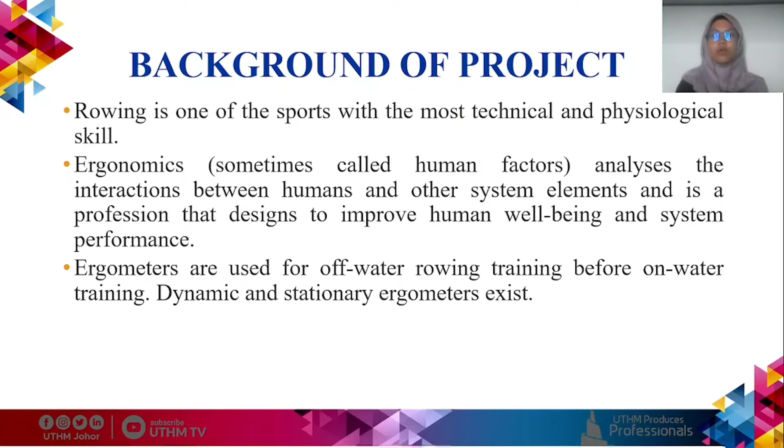An ergometer is one of the simulation tools on land for rowing training before going for on-water training. There are two types of ergometers: dynamic and stationary ergometer.

For this project, it is critical to have an appropriate posture and proper procedure when using an ergometer to reduce ergonomic risk factors. This project examines ergonomic risk factors of rowing without adequate technique, which may lead to injury for rowers. Rowers may get musculoskeletal disease and repetitive strain injuries if they have bad posture.

Using REBA and a motion sensor, rowers can enhance their ergometer posture. A preliminary concept for this project's exercise posture includes an ergonomic review.

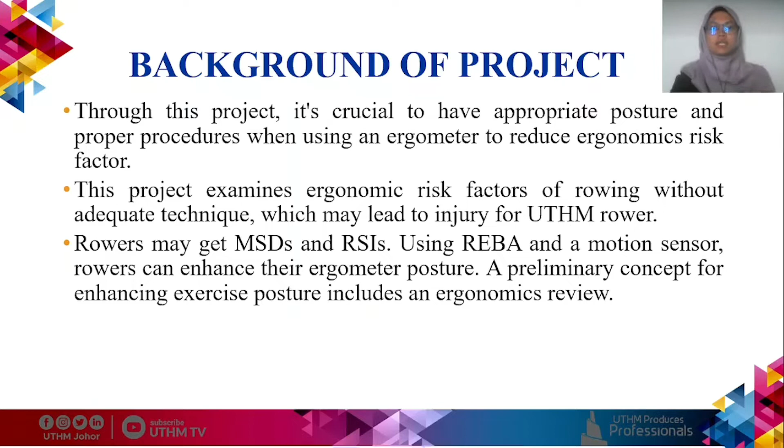We will proceed to the problem statement. In this project, the problem statements are: rowers often experience cumulative trauma disease and low back pain due to improper ergonomic posture, which is a bad posture in the ergometer rowing machine.

There is a lack of study on ergonomic risk factors for rowing ergometer machines that needs to be studied further. The majority of novice rowing or beginner athletes are unable to maintain an ergonomic posture on an ergometer rowing machine.

This project proposes an initial and advanced ergonomic risk assessment suitable for rowing ergometers that can analyze ergonomic risk factors.

In addition, using a motion sensor will improve a rower's ergonomic posture, which requires a greater ergonomic risk assessment and analysis. Poor ergonomic posture will increase the risk of slipped disc in the back and knees.

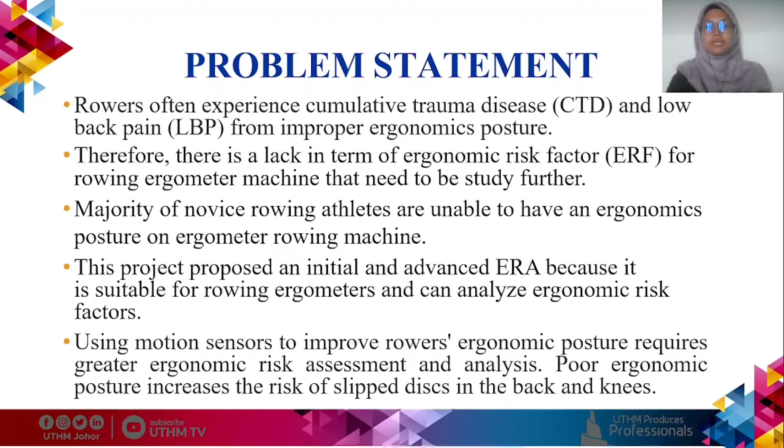The objectives for this project are: first, to conduct an initial ERA among rowing athletes at UTHM; second, to perform an advanced ERA for rowing athletes at UTHM; third, to implement a motion sensor device capable of guiding beginner rowing athletes at UTHM.

The scope for this project: a REBA worksheet was developed in accordance with DOSH. It was used to analyze rowing posture and movement using advanced ERA, advanced REBA, and motion sensor approaches. The height range selected for this project is 155 centimeters to 185 centimeters. The REBA technique is applied for implementing positioning of the motion sensor.

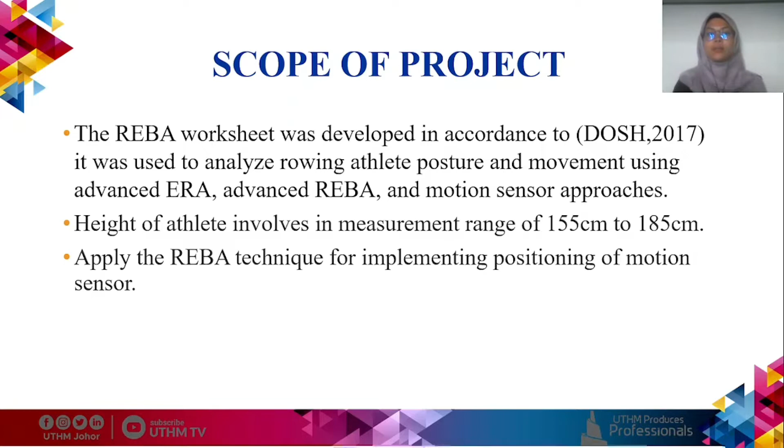The significance of this project is to increase awareness about the ergonomic risk factors associated with rowing athletes. As an alternative way, applying a motion sensor helps the athlete maintain proper posture during ergometer rowing machine exercise.

Next, we go for expected outcomes. What we expect from this project is to increase awareness about ergonomic risk assessment and deploy an ultrasonic sensor to improve rowing athletes' ergonomic posture, because this sport uses the whole body, so appropriate rowing posture is needed to decrease physical and mental stress.

Therefore, the ERA will train athletes on the importance of good posture and how to improve their performance via a motion sensor. This motion sensor device can guide athletes to a good ergonomic posture in the ergometer rowing machine.

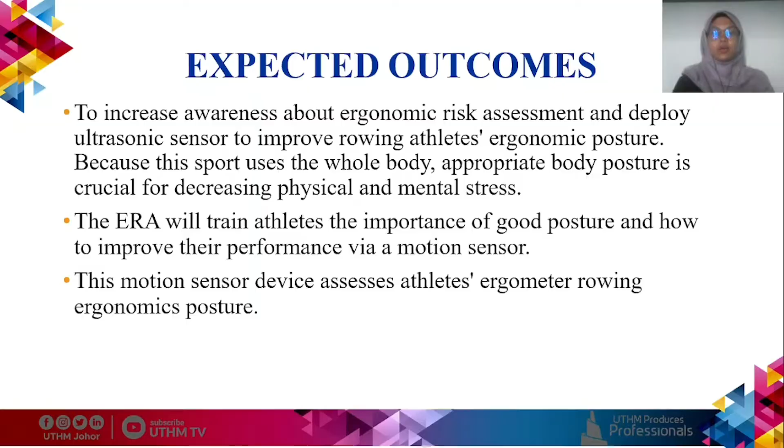So we move to the next chapter, Chapter 2, about literature review. In this literature review, there are some previous case studies I have gone through. The first one is about postural analysis using RULA and REBA.

The thesis is from Ansari and Sheikh. They found that RULA determined that most workers were at high risk and needed immediate change. Postural research by RULA and REBA demonstrates that overwork and bad posture are common.

The next thesis is on REBA in terms of development, application, validity, and limitation, by Al Madani and Dababneh. The final result found REBA useful for postural assessment in industrial health and care, construction, sawmill tasks, retail food, computer-based occupations, packing, school workshop, odontological service, firemen, and EMTs.

The method's drawbacks did not stop its deployment; it is still used and has computerized checklists and public domain tables.

The next thesis is a study analyzing rowing on a rowing machine using inertial sensors. The study is a comparison between experienced and beginner rowers, using machine learning to compare rowers to a reference rower.

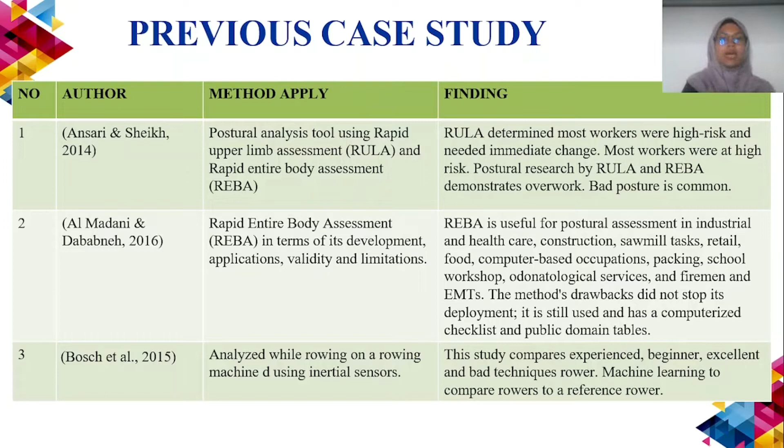The next case study is about an ultrasonic motion detector by Murtala Zungeru. It finds that the design senses enclosed motion. In this work, a transmitter transducer generates a 40 kilohertz signal that triggers a buzzer through a timing circuit. This system relies on signal interference from an intruder or moving object. The design installation fulfills standards.

Jones and Kumar have studies on 5 ergonomic risk assessment tools: RULA, REBA, American Conference of Governmental Industrial Hygienists Threshold Limit Value, Strain Index, and OCRA. The final result found that the percentage of perfect agreement varied by employment. RULA and SI worked best, with correct classification rates of 99% and 97% respectively.

The next case study is about ergonomic risk assessment tools including Quick Exposure Check and REBA by Motamedzade. It was found that the applied approaches have associated final ratings and action levels. Comparing action levels and final scores of the approaches shows no departmental differences.

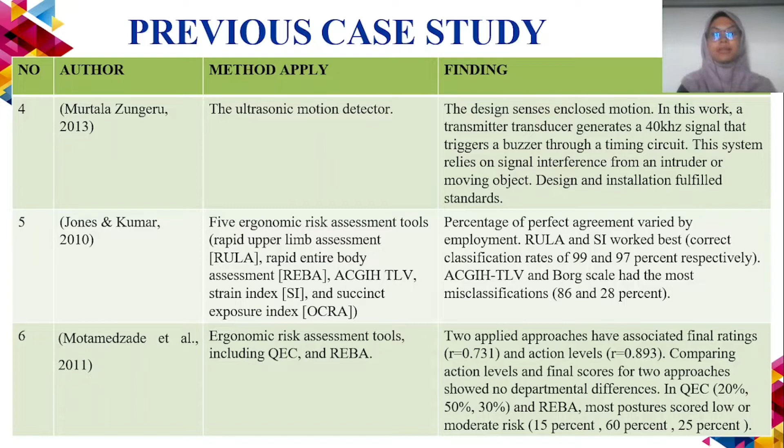The next case study used 3D skeletal modeling to imitate human body movement in an actual construction manufacturing plant for ergonomic risk assessment of a workstation. The final result found that 3 subjects were used to compare joint angle, body segment risk rating, and REBA or RULA risk rating and risk level.

Another study focuses on an ultrasonic sensor that measures the distance of a target object or material through air using non-contact technology. It detects an obstacle's distance. The inbuilt analog to digital converter is calibrated to measure distance accurately, and the LCD panel displays the measured distance.

This is based on Mustafa Gabriel and Paul Kuria's case study on the Arduino Uno microcontroller, ultrasonic sensor, passive infrared sensor, and others to sense and measure distance.

The test revealed the suggested sensor could accurately measure distance and display it on the LCD. The sensor emits a sound signal on a buzzer and a visible LED indicator for distances less than 150 cm, 70 cm, and 40 cm. This way of measuring distance is accurate. Enterprises and traffic agencies utilize distance sensing and measuring for proximity detection.

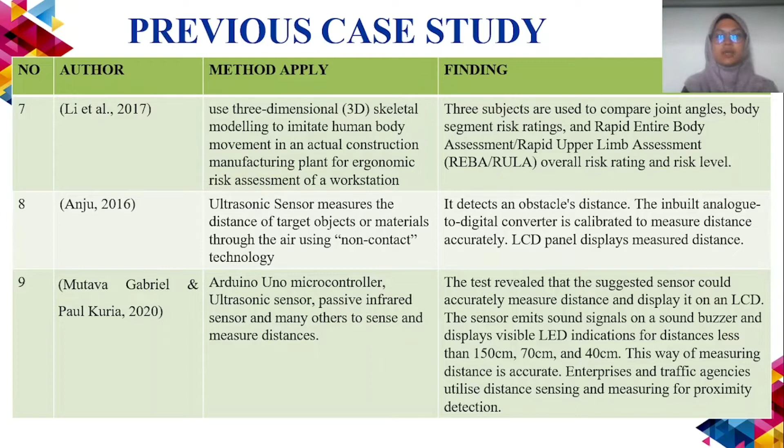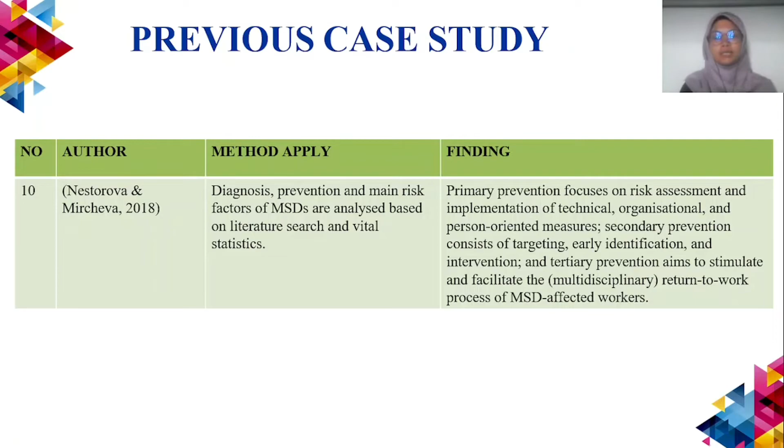Next, we go for the methodology of this project. The methodology will be concluded in this flowchart, from the start of this project until the end.

To start this project, we will go for the research background of study about ergonomics, about sensors, about rowing motion, and others. Next, we go for selection of the research question, which includes the posture and how we can analyze the data for the athletes.

Then we go for the posture. We collect the data by using videos or figures for the assessment. After that, we will conduct an initial ERA, and if it needs an advanced ERA, if yes, we will conduct an advanced ERA. If no, we will proceed to prepare the assessment report.

Next, after conducting the advanced ERA, we will apply a motion sensor to detect ergonomic posture on an ERGOMETER rowing machine based on the risk level. If no, after conducting the advanced ERA, we will go back to the research background of this project to find a suitable method to analyze the data for the rowing athletes.

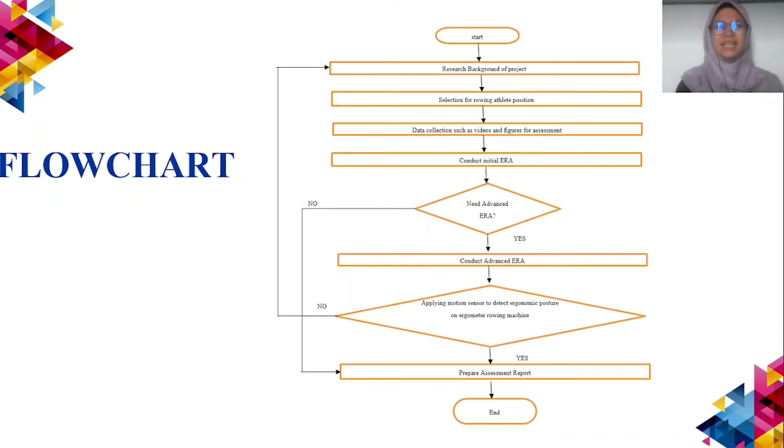If yes, we will prepare the assessment report, and that is the end of this project.

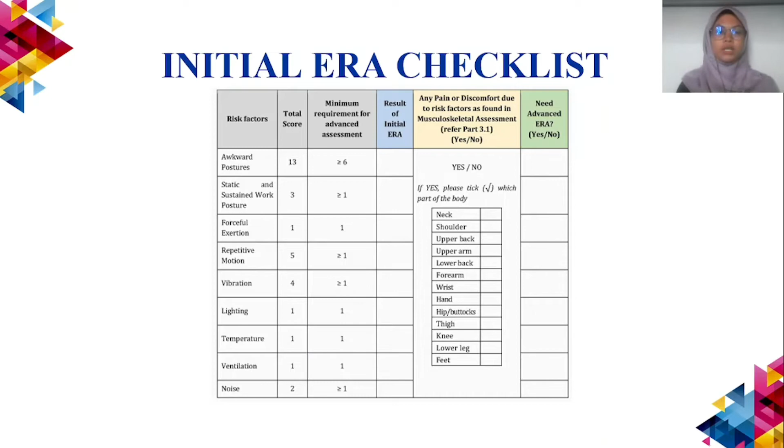Next, we go for the initial ERA checklist. There are 9 risk factors for the initial ERA, which include awkward posture, static and sustained work posture, forceful exertion, repetitive motion, vibration, lighting, temperature, ventilation, and noise. The result of the initial ERA, if high from the minimum required, we will go for the advanced ERA.

Next, we go for the REBA assessment. This REBA assessment is an advanced ERA after exceeding the minimum requirement from the initial ERA. So the advanced ERA includes six parts of the body, which are neck, trunk, leg, upper arm, lower arm, and wrist.

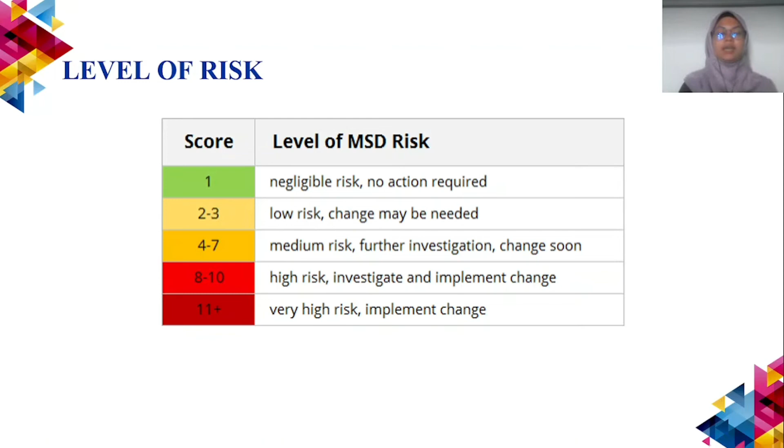This is the level of risk as mentioned before. There are 5 levels. The first is 1: the level of MSD risk is negligible, no action required. If the REBA score is between 2 to 3, it is a low risk and change may be needed. If 4 to 7, it's a medium risk and further investigation is needed. 8 to 10 is a high risk, needing investigation and implementation of change, and 11 and above is very high risk, requiring change to be implemented.

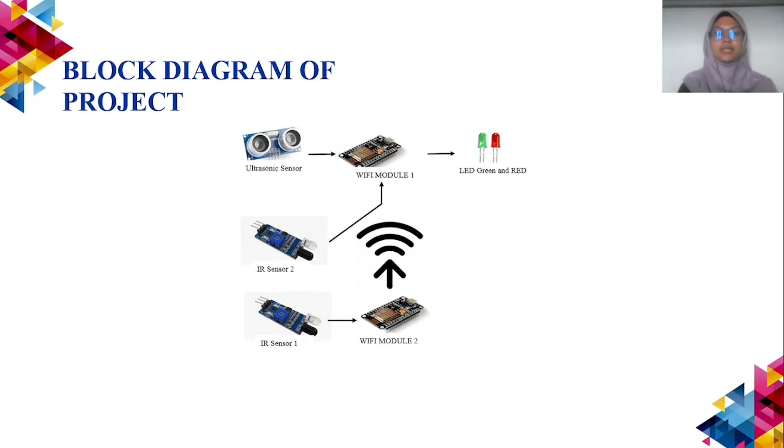Next we go for the block diagram for this project. The block diagram includes an ultrasonic sensor, infrared sensor 1, infrared sensor 2, Wi-Fi module 1, Wi-Fi module 2, and LED green and red. So this is the block diagram position.

In this project, the IR sensor detects the chest. The infrared sensor will be used to detect the chest, and this sensor will assess arm performance during rowing. Wi-Fi module 2 will act as a controller that receives a signal from infrared sensor 1, processes the data, and sends it to Wi-Fi module 1 via Wi-Fi signal. Wi-Fi module 2 is powered on using a 5-volt battery.

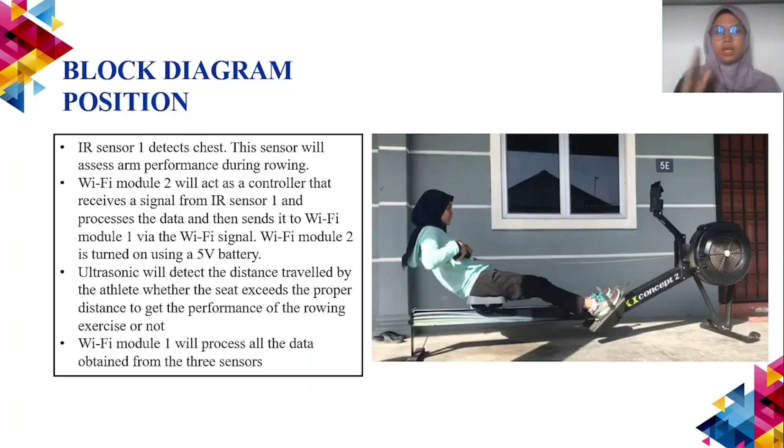The ultrasonic sensor will detect the distance traveled by the athlete, whether the seat exceeds the proper distance, to get the performance of the rowing exercise or not. Wi-Fi module 1 processes all the data obtained from the 3 sensors. The ultrasonic sensor will be placed on the seat at the ergometer rowing machine, as shown in the picture in the slide.

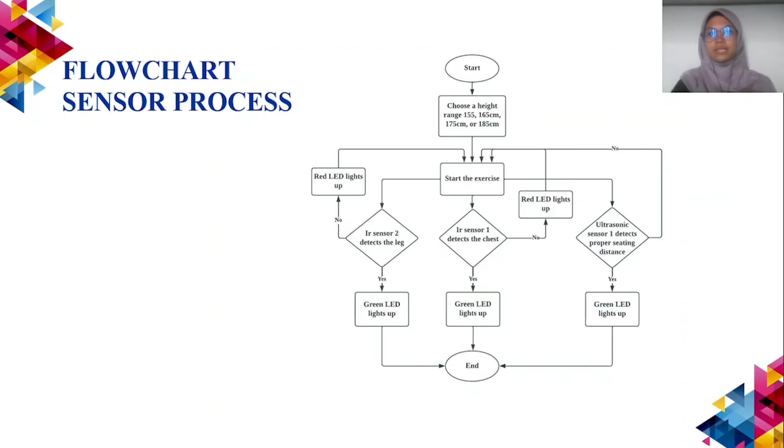If the rower is doing good posture, infrared sensor 1, infrared sensor 2, and the ultrasonic sensor will cause the green LED to light up — infrared sensor 2 detects the leg, infrared sensor 1 detects the chest, and the ultrasonic sensor detects the proper seating distance. If not, it will turn to the red LED, and the rower needs to improve posture at the ergometer rowing machine. That is the process of how the sensor detects proper ergonomic posture on the ergometer rowing machine.

Last but not least, we go for the data analysis and results. What we expect from this project is that this design can assist a rower in training more effectively and with discipline. Rowers who have potential but are not currently rowing athletes will quickly adapt to rowing movement and posture, allowing them to acquire a high degree of physical fitness.

The sensor will also accurately detect the athlete's body based on the REBA method, and properly identify the athlete's body position. In addition, athletes will also be capable of performing rowing exercises with discipline and effectiveness.